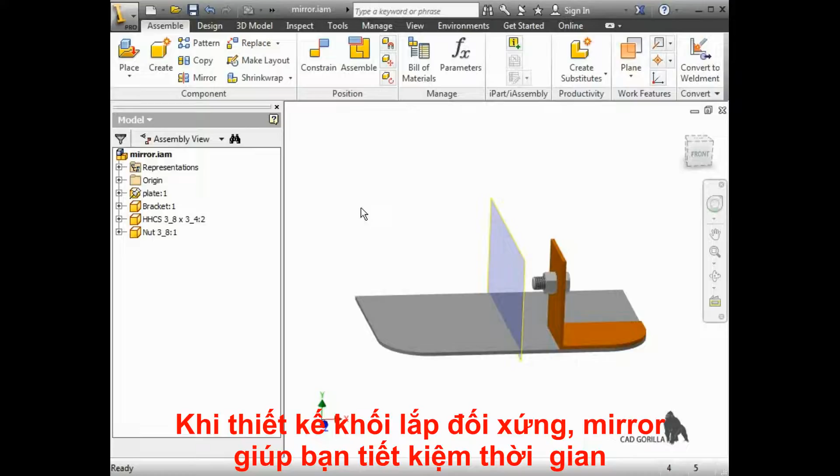When you design assemblies with symmetrical or left and right-handed components, mirroring can help save you time. Mirroring rotates the copies of the components 180 degrees and locates them the same distance from the mirror plane as the originals. You can choose whether each component is copied or if a mirrored version is created. You can also change the orientation of components.

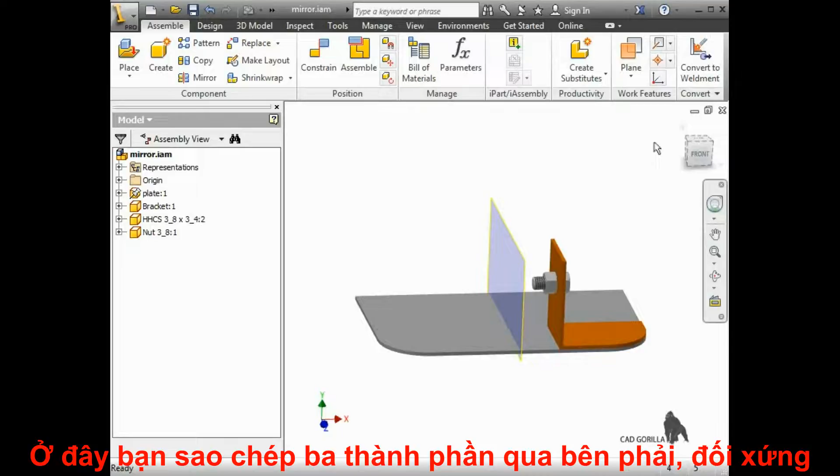Here I have a simple assembly consisting of 4 components: a plate, a bracket, a bolt, and a nut. I also have an assembly origin plane visible, as I'm planning on using this as the mirror plane so I can copy the parts to the other side of the plate. I'll switch the assembly to the home view. And then I'll launch the mirror command from the Assemble tab.

Component selection is active when mirror starts, and you can select the components in the browser or the graphics window. If you want to remove a component, press the Control key and select the part again. Next, I'll select the mirror plane. In this case, I am using the assembly YZ plane, but you could use any plane or planar face. The mirrored components are previewed as soon as I select the mirror plane.

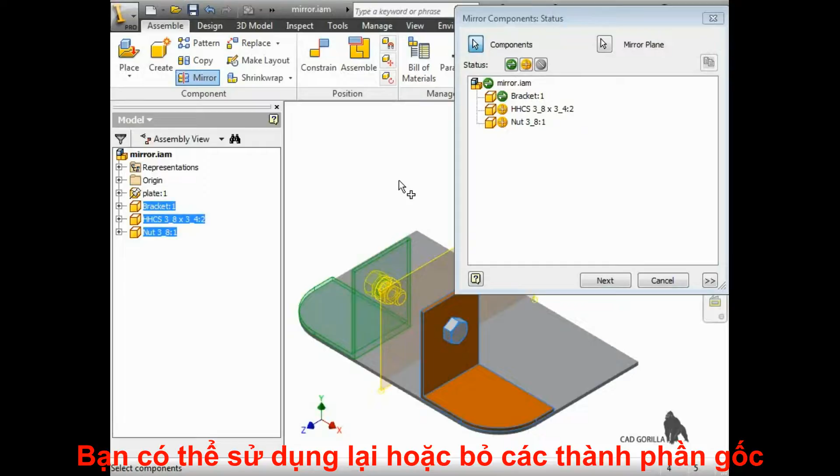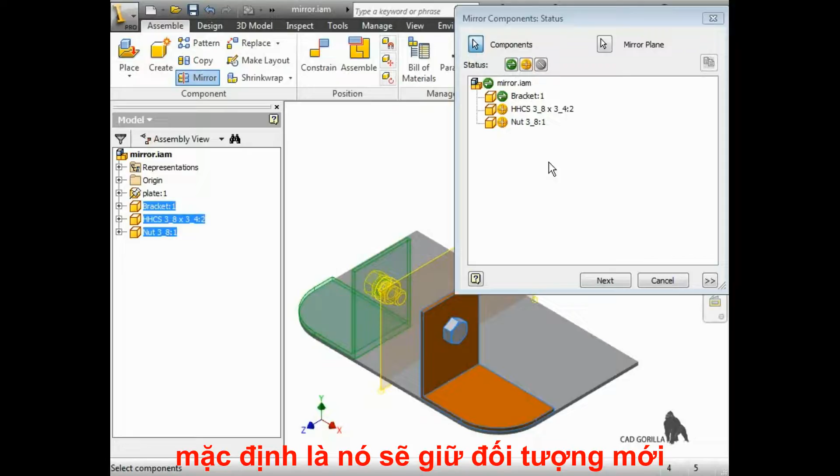The next step is to define whether I want mirror to create new components or reuse the existing ones. There are 3 status buttons. The green button with the plus sign creates a new component that is the opposite of the original. The yellow button with the double arrow reuses the component. The gray button with the slash excludes the component from mirroring. You typically use exclude on components in subassemblies. Most components are set by default to create a new one, but standard parts like fasteners are set to reuse.

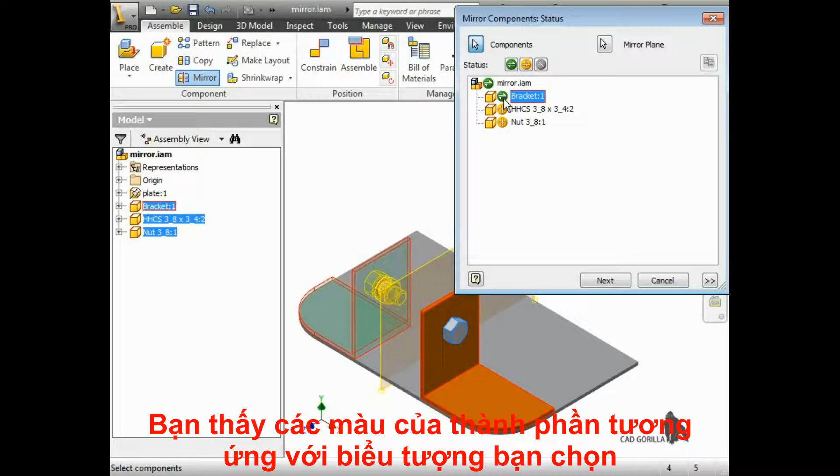You can click on a button to change the status of the selected component, but you can also cycle through the status options by clicking the component button. The preview shows the parts in the same color as their status buttons. When I click the status button for the bracket, it changes to yellow for reuse. Then it disappears for exclude, and it becomes green again for mirrored. I'll set the bracket to reuse so we can explore the orientation options.

When you look at the preview, you can see the curved corner of the bracket isn't aligned with the plate. Since the bracket is set to reuse, you can change the orientation. When I right-click on the status button, the orientation options are automatic, and the XZ, XY, and YZ origin planes from the part. You can see how the part position changes as I select the different options. Since none of the orientations work, I'll set the part to mirrored. This time, the part matches the edge of the plate.

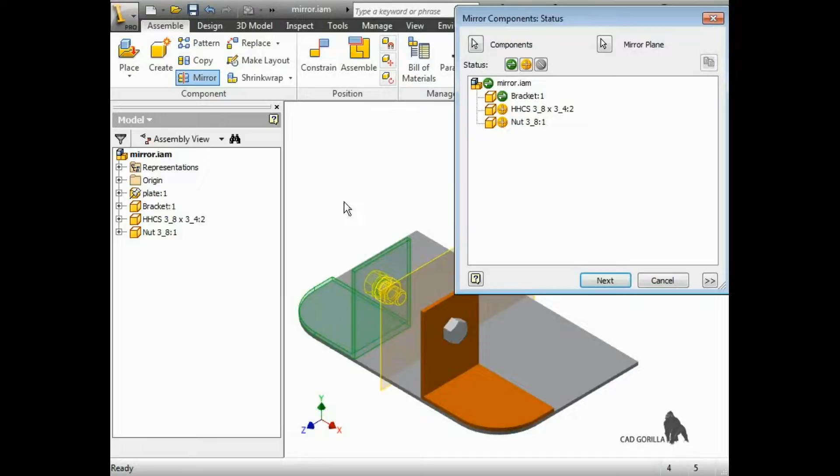The next button changes the dialog so I can specify the file names. The file naming dialog has a grid that lists the mirrored components and shows the new name and where it will be saved. I can click in the file name field to change the name. If I try to change it to the same name as the original component, the status changes to Reuse File because Inventor can't create a new component in the same location with the same name. If I either change the file name or select a different location for the file, the status changes back to New File.

There are 3 options to modify the file name. The default is to add the underscore MIR suffix. You can also add a prefix or increment the file name. Apply is enabled if you change the settings, and it actually does 2 things. It adds the suffix and/or prefix to the file name, and it updates the default setting. Increment only adds a number if the file name is the same as the original. If you deselect all of the options and click Apply, then the default is increment. You can click Revert to remove the last change.

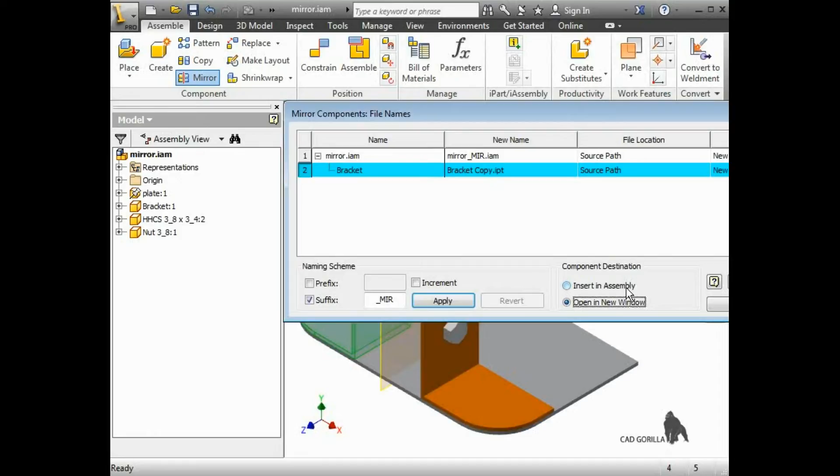You can also decide whether to place the components in the assembly or open it in a new window. If you choose New Window, an assembly with the mirrored components is created, but it isn't added to the original assembly. If you reuse all of the components, this is the only control on the dialog that is enabled. When I click OK, the parts are added to the assembly.

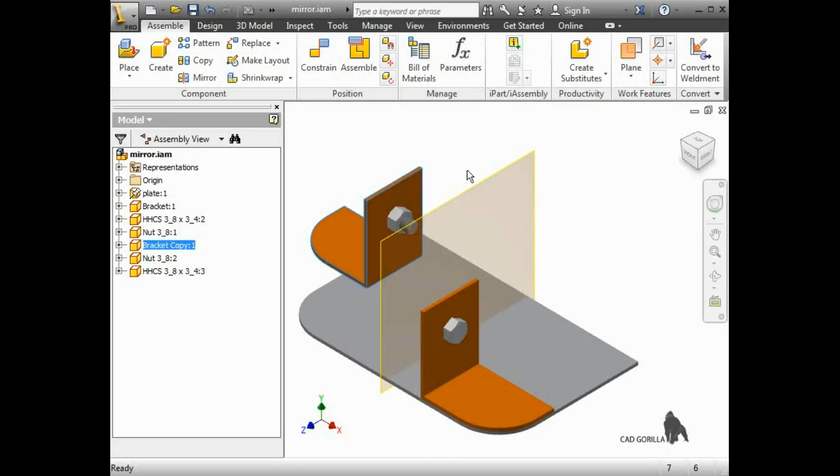The parts are constrained together, but they aren't constrained in the assembly. This makes sense because parts are usually positioned relative to the model geometry and not a fixed distance apart. If the plate changes, the part position will update to match it. This allows you to position and constrain the parts in the assembly without deleting or editing constraints to the original parts.